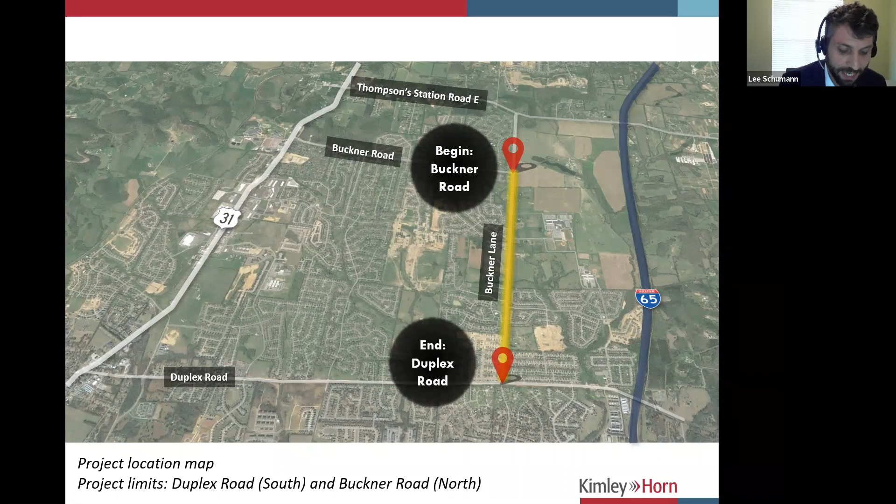Breaking the project into phases provides a lower risk of the entire project being delayed by right-of-way negotiations or utility conflicts. It also allows flexibility in the schedule to navigate the narrow corridor of the south segment. Based on that, we felt we had a higher potential for benefit in a phased approach, and more potential for delays in the design and construction of two miles of roadway.

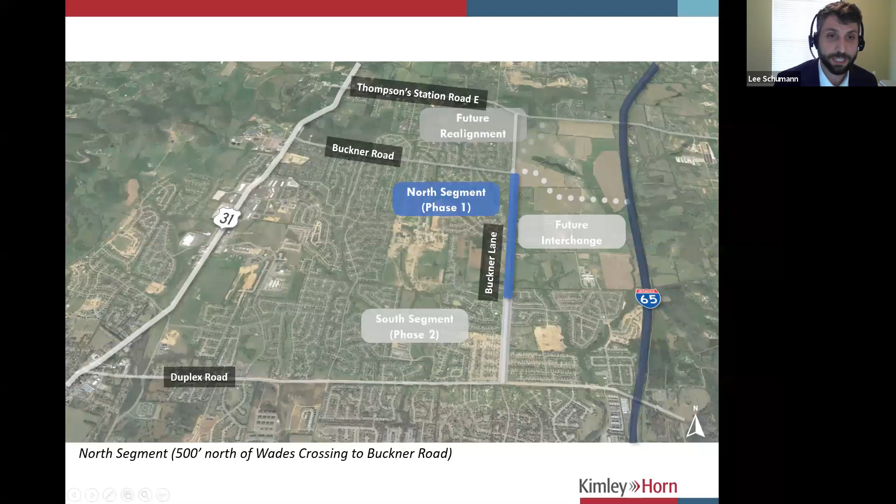So where are we in the process? Currently, we're finalizing the preliminary design of the north segment. Preliminary design represents roughly 30% of the design effort. Our goal here is to understand the design elements and impacts before we get into the detailed design in later phases. The next upcoming task on site will be the geotechnical investigation.

The purpose of this is to get soil and pavement borings along and adjacent to the roadway to understand pavement and soil conditions to aid in our design efforts. Some of you may have received letters explaining small cores may be taken along your property adjacent to the road, and for the rest of you, you may notice short lane closures for coring of the existing pavement. Luckily, this is a fairly quick process.

Next, we're in the process of gathering your feedback. So please ask questions during the presentation. As Chuck mentioned, there's a Q&A function at the bottom of the screen, and please be sure to fill out your comment card afterward. We'd love to hear what you have to say.

Finally, we're preparing to begin the right-of-way design services, which is the next phase in design. In this phase, we will get into more detailed design aspects of the project and work to nail down the construction limits of the project.

As most of you know, traffic is an issue now, and with the redistribution of traffic from the I-65 interchange and new development along this corridor, I think we can all agree increased capacity is needed on the roadways. As I noted earlier, this project will provide connectivity to the newly constructed Duplex Road and the upcoming interchange. Its construction is also very integral to meet the requirements of the interchange build grant, as well as providing other modes of transportation with the proposed sidewalk and shared use path that run along the roadway.

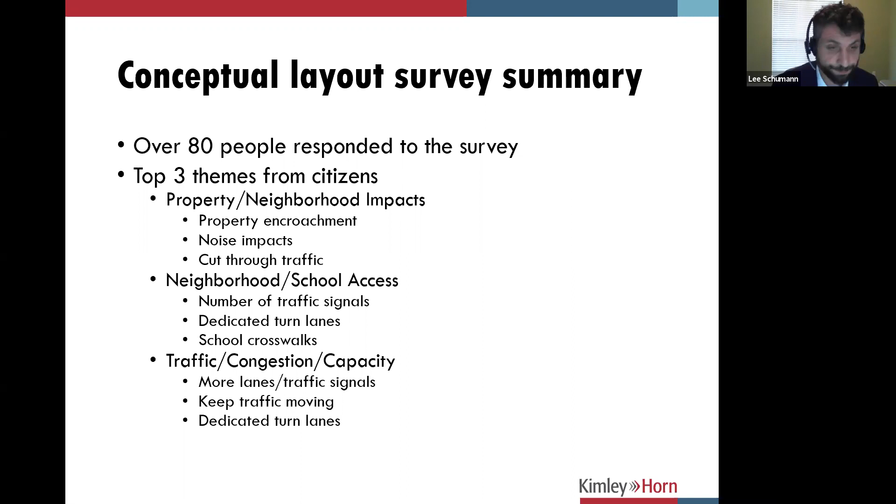So as you know, Buckner Lane is primarily a 2-lane arterial road with little to no shoulders, ditches on either side, and it serves about 9,500 cars a day.

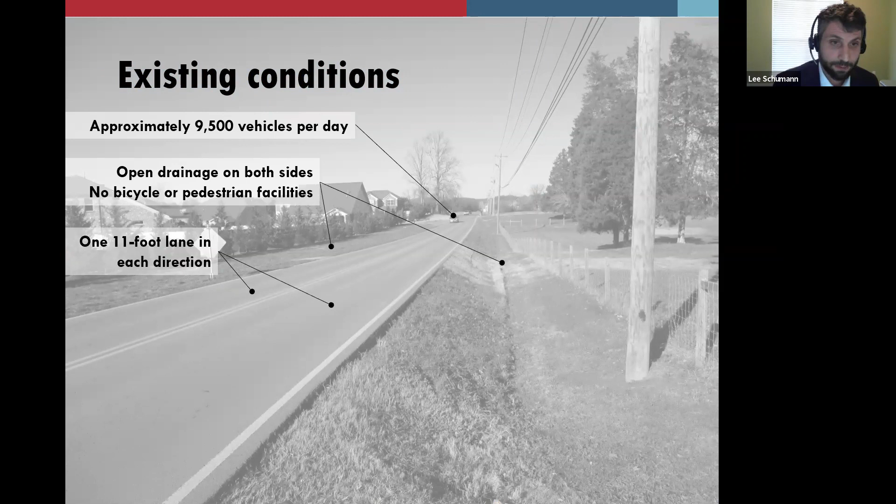For our proposed typical section, we took the city standard arterial section, which has a 95-foot right-of-way, and after collaboration with city staff and feedback from you, brought it down to an 85-foot right-of-way width in an effort to provide the needed capacity for future traffic, as well as bike and pedestrian facilities.

We tried to do this while limiting our footprint along the corridor. This has been done through narrowing the grass strips and travel lanes, and removal of bike lanes. Also, we've added curvature along the alignment to minimize impacts to properties directly adjacent to the road, as well as to take the straight-as-an-arrow racetrack feel away from the road.

Next, Brad Waldschmidt will discuss the traffic analysis performed for this project.

Thank you, Lee, I appreciate that. So as we move to the next slide, we all know Spring Hill has been growing and continues to grow, and in particular this area of Spring Hill along the Buckner Lane area is going to continue to grow in the future. Lee's hit on some of those.

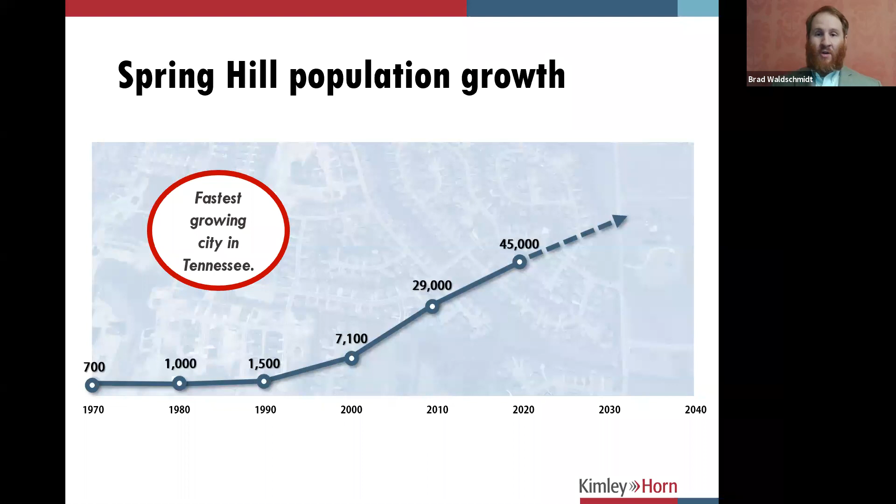As we move to the next slide, some of the reasons for the future traffic growth are developments like the Alexander property, as well as the Buckner Road extension to the future I-65 interchange. That's what's leading to our traffic forecasts showing that in 20 years, traffic volumes along Buckner Lane will reach 24,000 up to 38,000 cars per day.

That's what has driven a traffic analysis to show that Buckner Lane really needs to be 5 lanes when all this traffic growth occurs out in this area. So as we moved into our traffic analysis, we took all this into consideration.

What we noticed is several traffic signals will be needed along this corridor of Buckner Lane. Tonight, since we're focusing on this northern piece of the project, we're going to focus on the 3 intersections shown on your screen in blue: Twin Lakes Drive, Stewart Campbell Pointe, and Spring Station Drive.

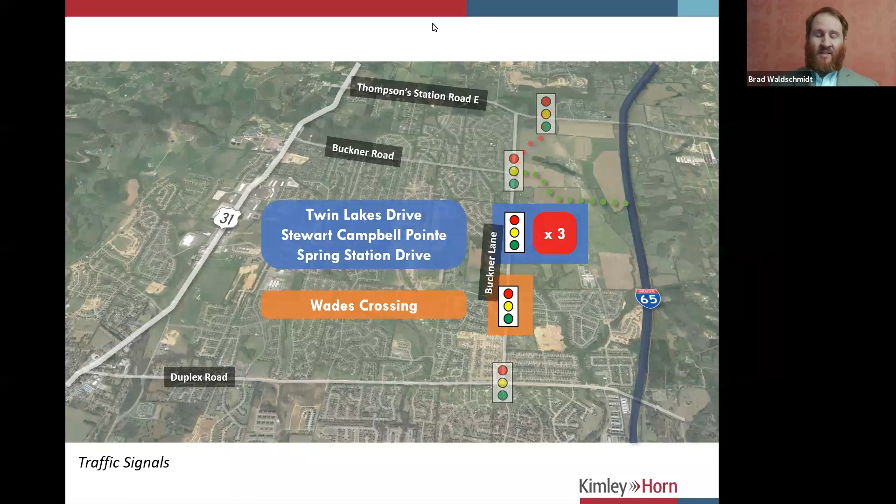Zooming in on the next slide to those intersections, the traffic analysis showed that based on the traffic volumes on Buckner Lane, as well as the traffic volumes using Twin Lakes, Stewart Campbell, and Spring Station, there will be traffic signals needed at each of these 3 intersections.

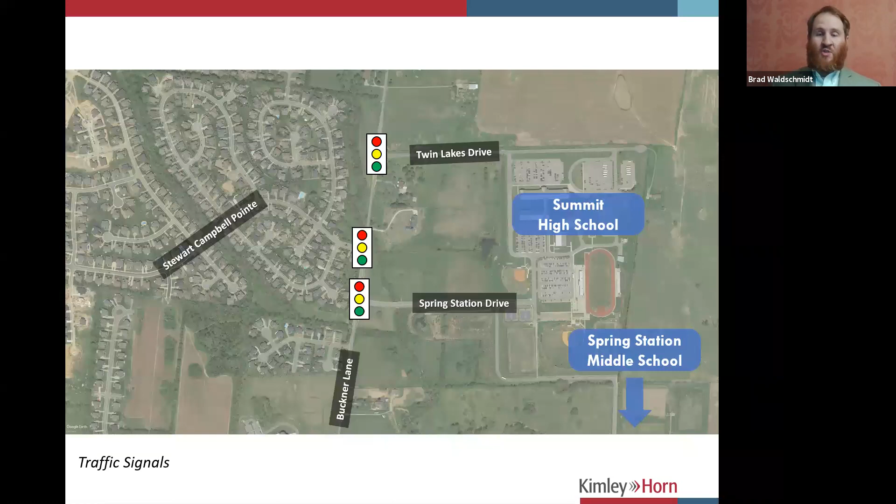In conjunction with those traffic signals, signalized pedestrian crossings will also be provided so that pedestrians and bicyclists using the sidewalks and shared use paths will be able to cross through the intersection and cross Buckner Lane, which will be very helpful and valuable, especially given the project's proximity to Spring Station Middle School and Summit High School.

Additionally, at each of these 3 intersections, because of the traffic volumes turning there, we're also incorporating left turn and right turn lanes into the design to minimize impact to the general through movements along Buckner Lane. So these are the inclusions in the design based on the traffic analysis to handle the forecasted growth.

Primarily at these 3 intersections, where we think there'll be more turning movements, as well as these 3 traffic signals, these have really been some of the driving forces helping to influence the preliminary design.

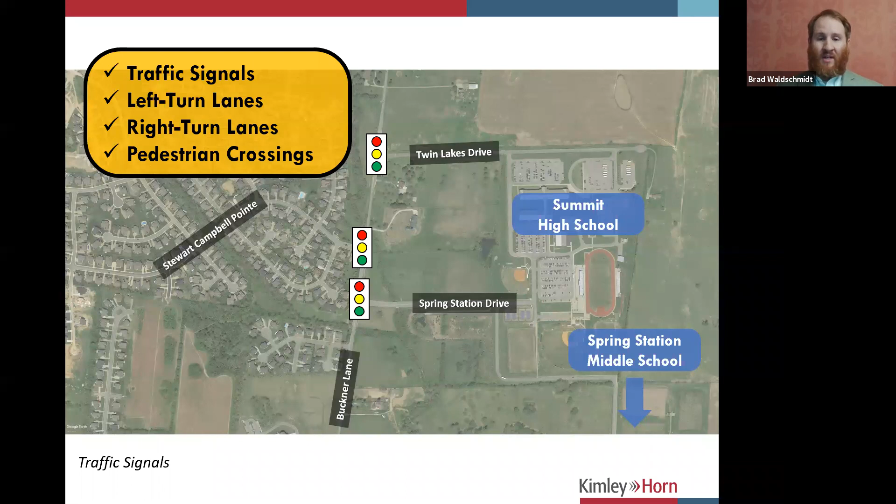And I'll turn it back over to Lee to kind of walk through the preliminary design. Thanks, Brad.

So here's an overview of the north segment. The next few slides break down the preliminary design into smaller segments so you can see it in more detail. These next few slides are available to download.

Since we can't meet in person, I'd like to go over the exhibits with you to explain a few things and hopefully make it easier for you to review at home.

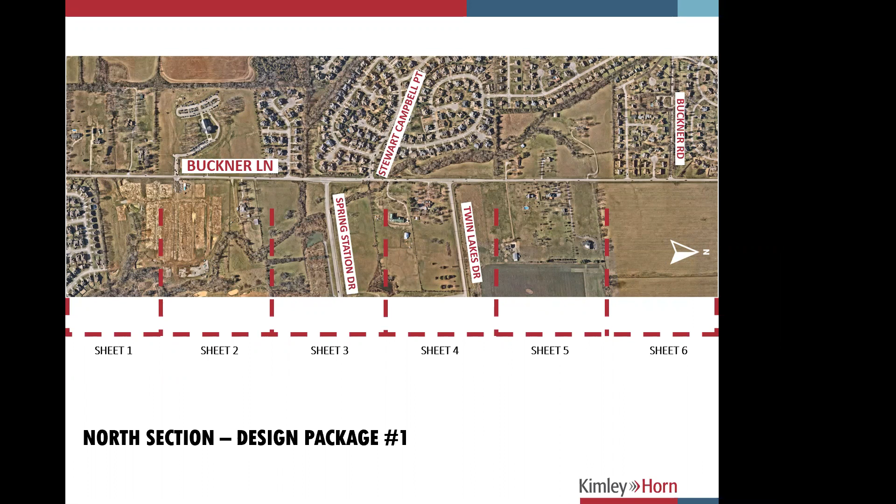This slide is the beginning of the north segment. In these exhibits, you will see the existing conditions, which are shown in gray. The bold lines represent the proposed layout as well as future striping.

The red shading represents the permanent right-of-way that will be needed for the project and will essentially encompass the roadway, sidewalk, and shared use path. In green, you will see the limits of the slopes, which represent the length or area it will take to

tie the side slopes back into the existing ground once the improvements are made. This is a temporary slope easement and will be grass when construction is complete. The blue shading represents the temporary construction easement, which is room given to the contractor to maneuver as they construct the project. The hatched red lines are permanent drainage easements that encapsulate drainage structures outside of the right-of-way to give room for the city to provide maintenance.

Now, in terms of the preliminary design, you can see the tie point that will be made between the northern segment and the existing roadway, where we go from a 5-lane section to a 2-lane section.

Also on this sheet, you'll be able to see some preliminary drainage. The black shaded rectangles are inlet locations. The arrowed lines are ditch locations, and the open-ended rectangles are head walls, which capture drainage from adjacent properties.

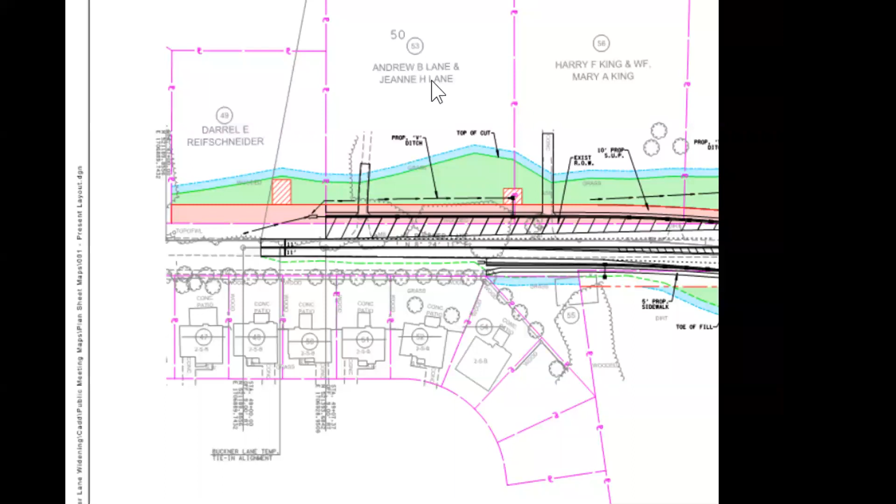On this slide, we are adjacent to the Church of the Nativity, just to orient you a bit. As you can see, the property owners' names are in gray, and that'll help you as you review from home.

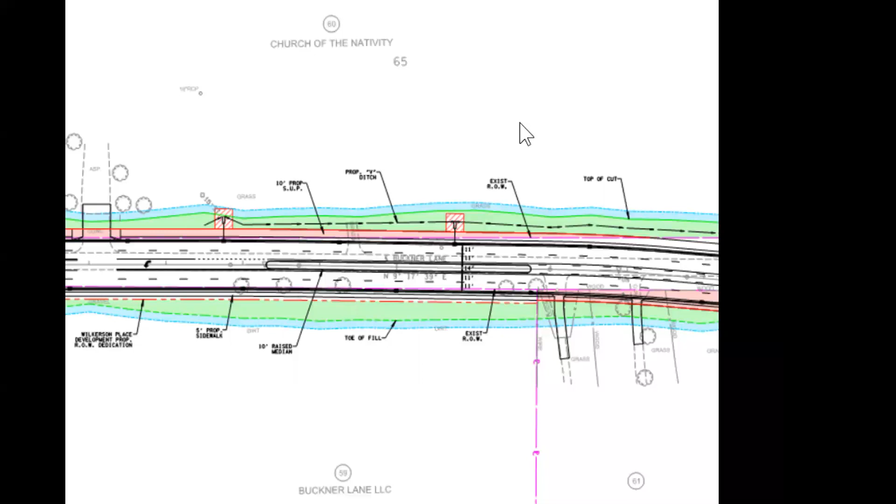A few new aspects on this slide is the location of a raised median, shown roughly in the middle of this slide in the center turn lane. Also, you can see where we have added curvature on the far right side of this page to minimize impacts to the homes that are directly adjacent to the roadway at the Glessner intersection.

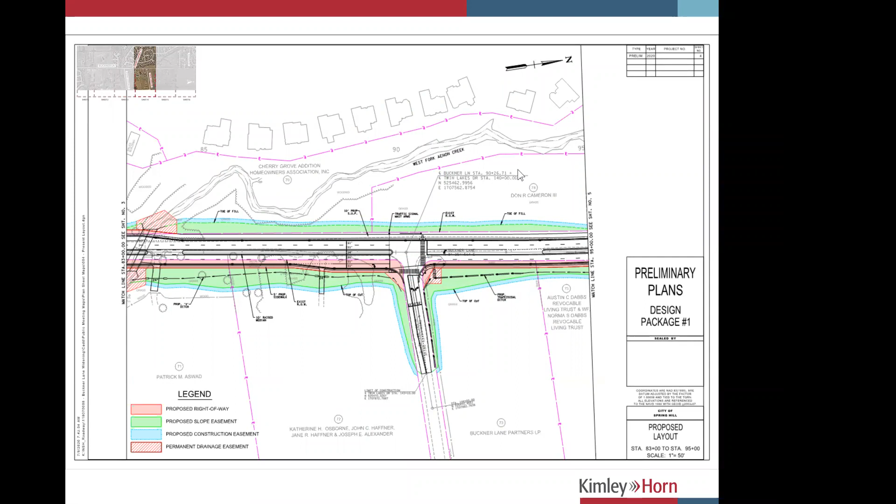This slide is located at Twin Lakes Drive, which shows the second box culvert. You can also see the dashed purple line that represents the existing right-of-way that runs adjacent to either side of the roadway. You can also see another dashed line with the text PL, which represents the property lines along the corridor.

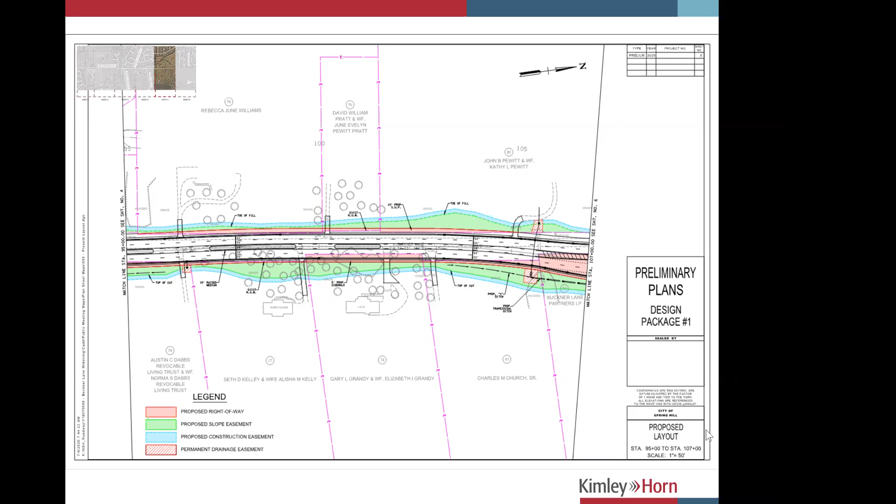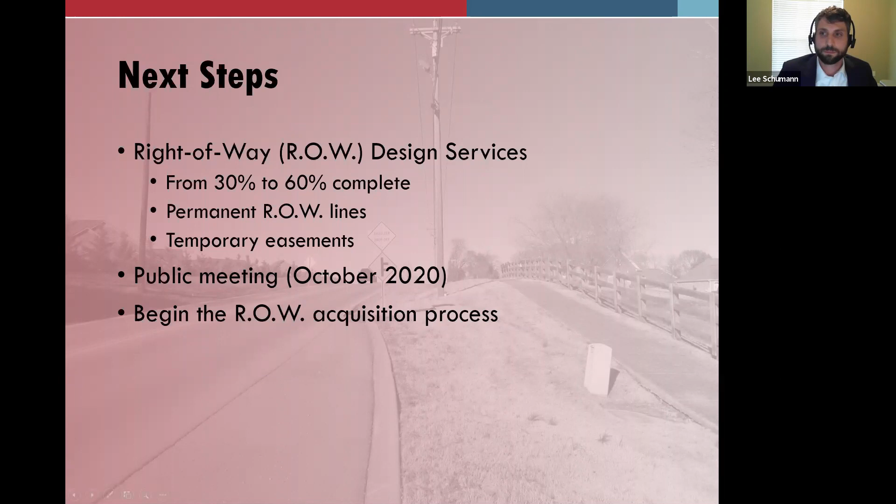Great. All right, so why don't we do another question? Okay, so here's a question from someone that lives on Eric Court, which is a cul-de-sac, and they want to know how they'll be able to turn left, which I presume they mean how to turn left onto Buckner Lane.

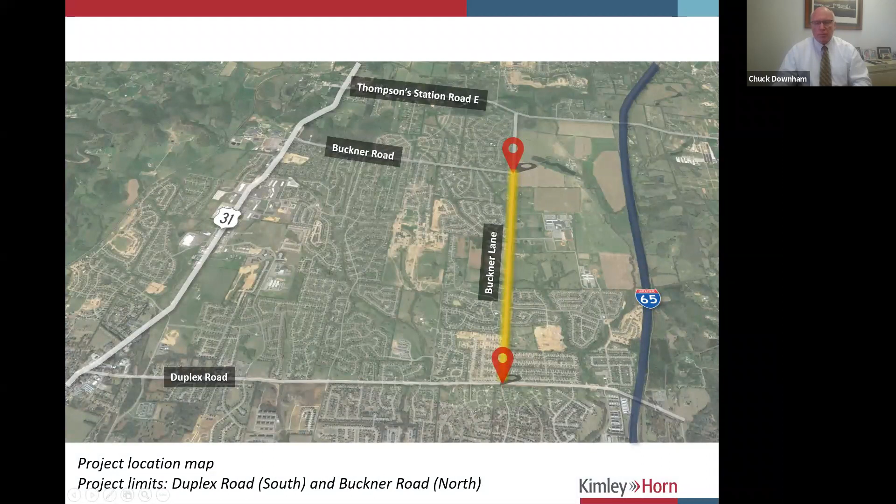Kevin, do you want to field that question using the plan graphic from the latter part of the presentation package? That might help illustrate what's being proposed in terms of design. Yes, although I will -- oh, here we are, Eric Court right here. Perfect. Right.

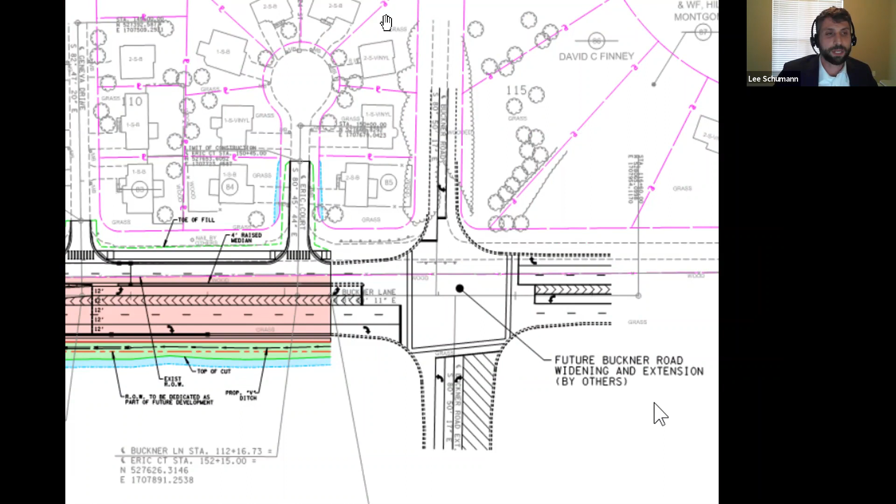So, Lee, your thoughts from a design engineering perspective, and we may want to call on Brad if he's available. From a design perspective, unfortunately, Eric Court falls in very close proximity to the center of this intersection. You can see, in order for them to go northbound, they would have to cross 5 or 6 lanes of traffic. So to limit turning movement conflicts, we've had to block this access with a small raised median. The folks on Eric Court will have to go southbound on Buckner Lane and take Geneva Drive around to Buckner Road in order to go northbound on Buckner Lane.

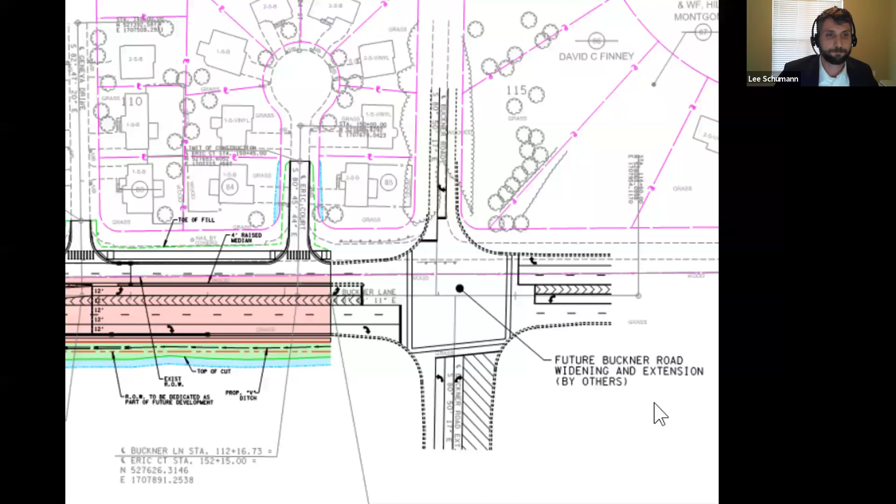Thank you. Okay, our next question asks about noise: is there any provision for noise abatement?

I think generally speaking, we obviously have a major road corridor, and we've had a number of people in the different comment opportunities provided along the design process express concerns not only about aesthetics, but also the proximity of traffic to homes, and what we're doing in terms of potential noise abatement. For the road corridor itself, there is not a current design intent to include barrier walls or noise barrier walls as part of the design process. A lot of that has to do with the insufficient amount of right-of-way to accommodate those types of structures.

Not to mention just the abruptness that often those will create from a design and aesthetics perspective. What we hope to accomplish along the corridor are different types of aesthetic treatments, landscaping, buffers, and other screening measures that could serve in part to help dissipate and address some of the noise associated with traffic along the road corridor. Can we completely eliminate noise?

Absolutely not. The road is already a very busy corridor, it's already a noisy corridor. Our hope would be that we can introduce measures and work cooperatively with property owners associations to help reduce some of the impact associated with noise on the corridor. Lee, anything else to add from a design perspective? I think you hit most of the topics.

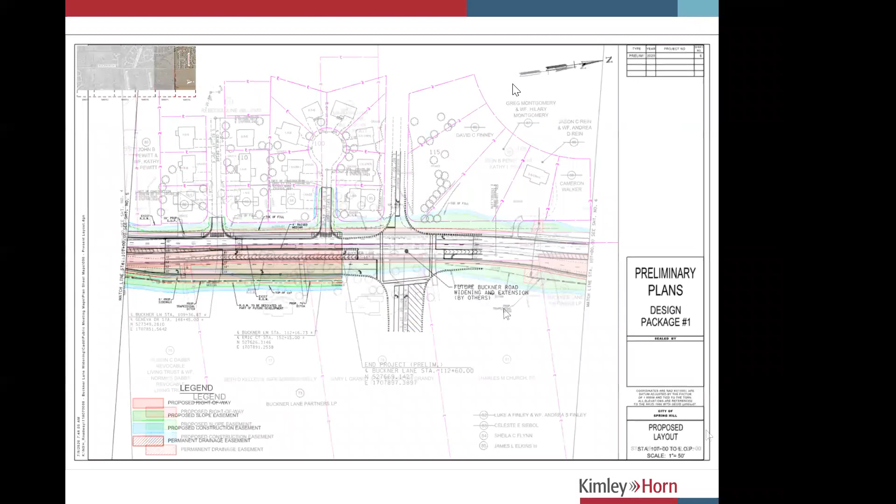So I will go back to that. You guys will have to. That may be something we have to address later, and maybe get with this person, because I'm not sure I can address that off the top of my head. Okay, yeah, I'm not either. Chuck or Victor, if you guys can.

I think the fundamental question there is, are we going to allow U-turns at any of the major intersections? If they can't turn left out of their driveway because of a raised median, are we going to design in U-turns at the major intersections is, I think, the real question there. Well, there's no intention of blocking any private drives with the median.

So, we do not have accommodations for left turns at Twin Lakes, or U-turns, pardon. Okay. What I might suggest, because that series of questions involved a specific property, we would encourage that property owner to reach out to either Victor Lay or myself, Chuck Downham. Let us pull up the plans. We can schedule a virtual meeting with you, or a call, or even have you drop by City Hall and visit with us, so we can go over the plans in a little bit more detail.

I understand there may be another question regarding that same property. We can certainly get into specifics of that involving any property owner along the corridor, and schedule a one-on-one conversation with them if that would be preferred. That way we could get into a lot more detail probably than this type of setting.

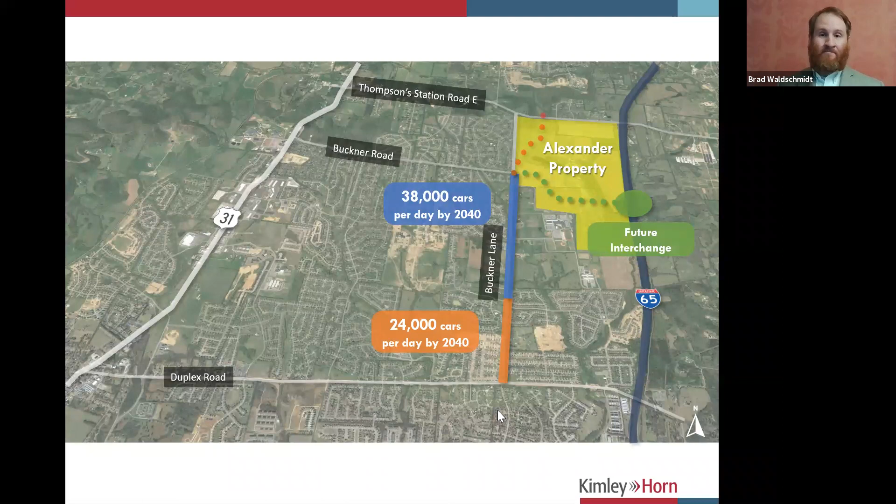I appreciate that, Brad. I think you covered it very well. Hopefully that addressed the comment question we received. Kevin, what else have we heard?

So we have a question about the property. What will be done with the existing farmland along Buckner Lane between Buckner Road and Thompson's Station Road? What is the proposed start date, and from which direction? That's a great question, and certainly there's a lot of dimension to the answer.

The best thing I can suggest right out of the gate is for the person inquiring to get on the city's website and query 2660 Buckner Lane, that's the name of the project. It's a large mixed-use master plan project approved back in 2017. They're going through a plan amendment process right now, so you'll see current information on some minor changes the developer is proposing.

The expected timeline is that the project will develop starting on the western edge of the property, then move to the inner core, and eventually to the eastern portion of the site. The sequence is a combination of residential and retail in the early phase, followed by more residential and commercial in the latter phase, and ultimately office development once the interchange is constructed. So it's a multi-year, multi-phased development approach, with a lot of road work and utility infrastructure being installed.

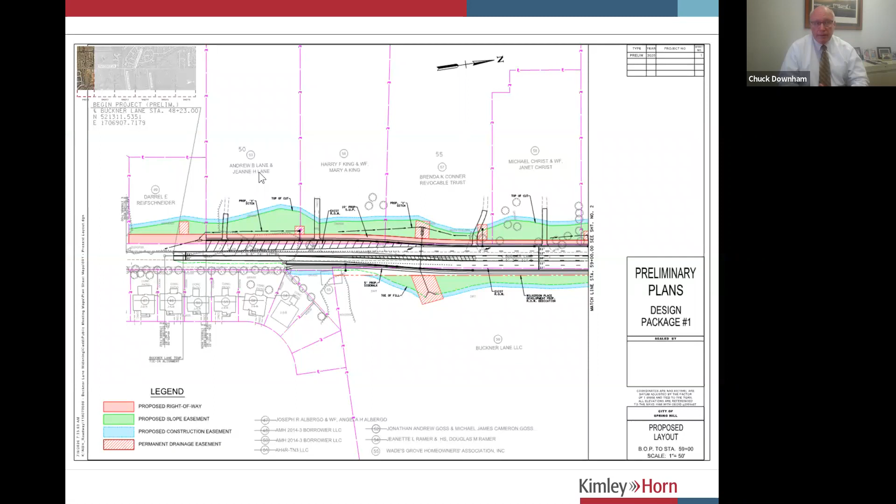Someone would like to know how they can find out more information regarding right-of-way on the north segment. During the presentation, you saw several different slides toward the end that go into detail as far as the extent of the impact, both for right-of-way and easements. Our recommendation would be for that person to take a look at those slides, as well as the PDFs we'll be posting to the city's website. If they have specific questions about a particular parcel, feel free to reach out to us, and we can go over those in more detail with them. Hopefully the information we've got, both in the presentation and the individual sheets, will give them answers to those questions.

Okay, and a couple more questions. This one I think I can answer. Is the meeting at 7 covering the same material? And that answer is yes.

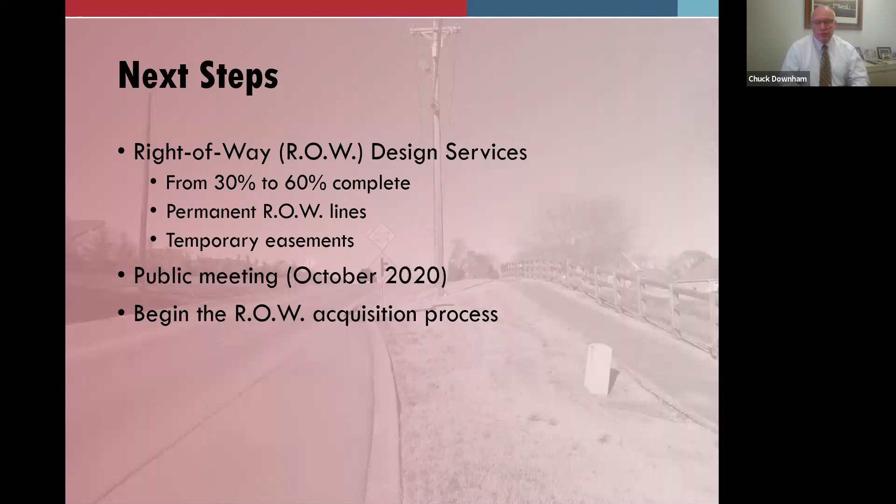We have a question about the anticipated speed limit of the road. I'll let Lee or Brad address that. We have a design speed as well as what we anticipate to be the posted speed. The posted speed will remain the same. Our design speed will be 45 miles an hour, and it will be posted at 40.

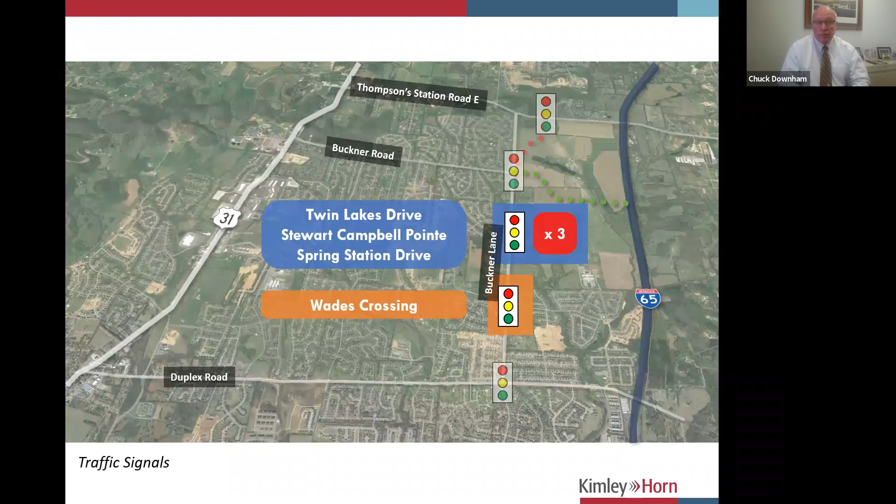Thank you. And then one last question asks, the northernmost section of Buckner Road, what will happen after it is realigned? What will happen to the existing road? Will it be covered in grass, for example? It's a great question. I don't know that there's been any final plans developed for that. There's been a lot of different things kicked around, including basically almost like a rail-to-trail type approach where the road would be abandoned and put into some type of a more passive use.

We expect that the westernmost edge of the Buckner Lane development project will be residential uses, so hopefully that will very much complement the adjoining neighborhoods right across the way. But there's been no specific plans at this point for what the city or the developer intends to do with that. I'm confident there'll be a lot more discussion and a plan developed in hopefully very full cooperation with the adjoining neighborhoods, done in such a way that everybody will hopefully benefit, whatever form it takes.

Okay, and now we really are at the end of our questions. That was the last question.

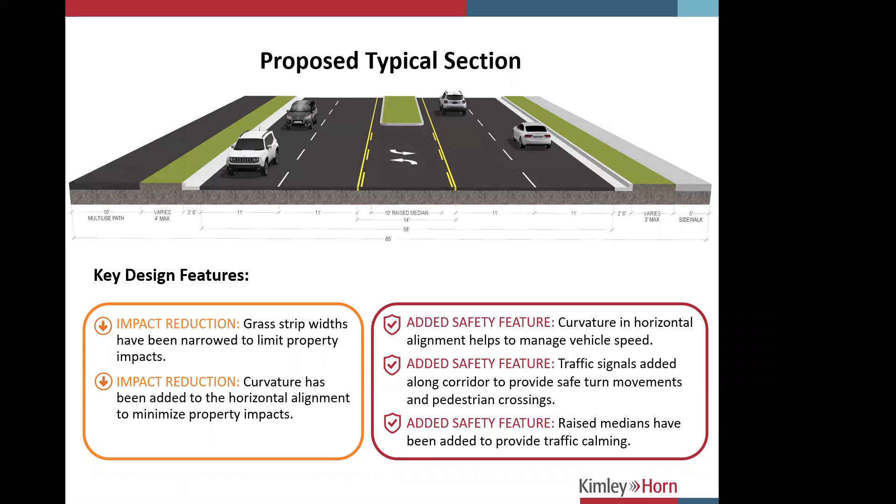We also received a handful of questions about turn movements, how people would be able to make left turns out of their development, for example. Let Lee or Brad try to field that particular item, because I know we provided a pretty comprehensive response on that. Sure, I don't mind taking that.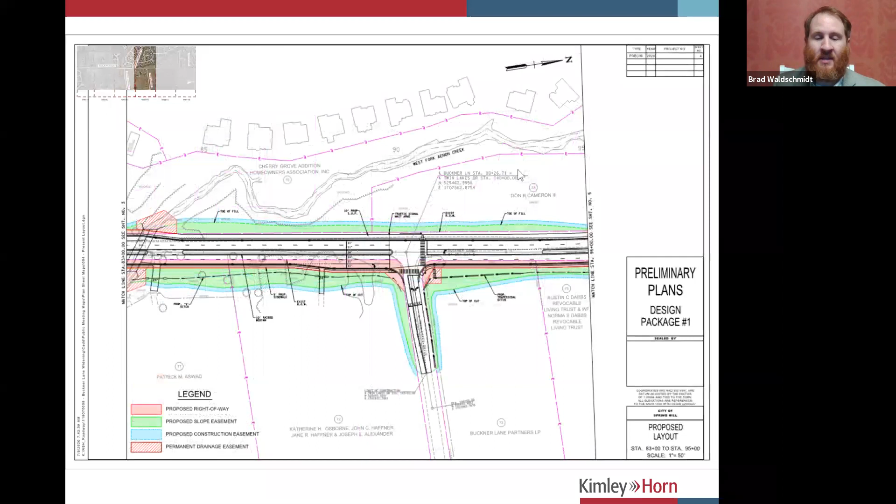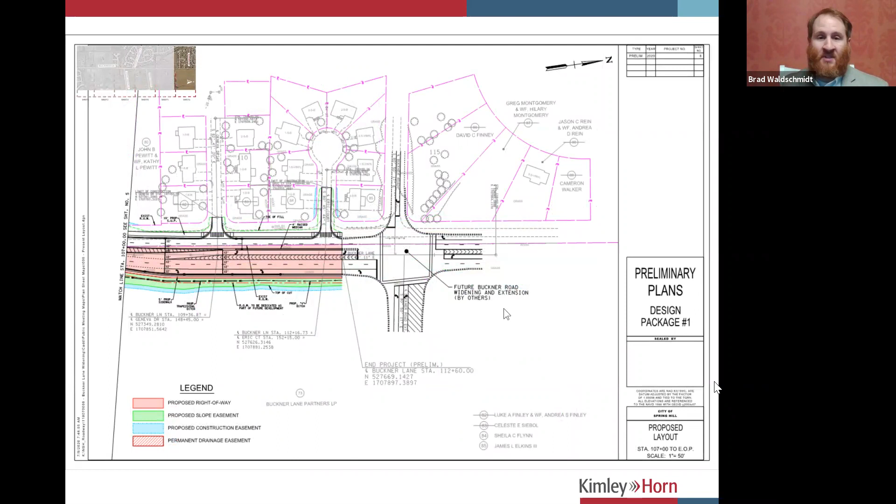Kevin, if you could move forward in the presentation to where Eric Court intersects with Buckner Lane -- I think that's a good example. Part of the traffic analysis and engineering design we looked at is as this road gets wider, especially at some of the larger intersections, what the intersection of Buckner Lane and Buckner Road will look like in the future. Just to the left of that intersection you see a cul-de-sac, which is Eric Court. Today, Eric Court sits on a 2-lane road, but as you can see on the design, Buckner Lane will be getting much, much wider.

For that reason, a hard median is being designed in front of Eric Court so that only right turns can occur. While that is an inconvenience, the reason is that turning movements and crossing many lanes of pavement to turn left in and out of Eric Court can be a problem and a concern sometimes. There are a few locations like that along the corridor, not everywhere and not in many locations, but some where engineering analysis and discussions with the city were applied to find locations like this, where a left turn out of an intersection would mean crossing many lanes of pavement. For that reason, this is occurring in some locations.

Lee, I'll turn to you if you have anything else to add. No, I believe you hit all the major points there. The other consideration is that for this particular location, the queuing of that left turn, especially if it ever develops into dual lefts, will be very difficult for a person to get out and go northbound from Merritt Court, not to mention the number of conflicts that will be caused by trying to cross that many lanes of traffic.

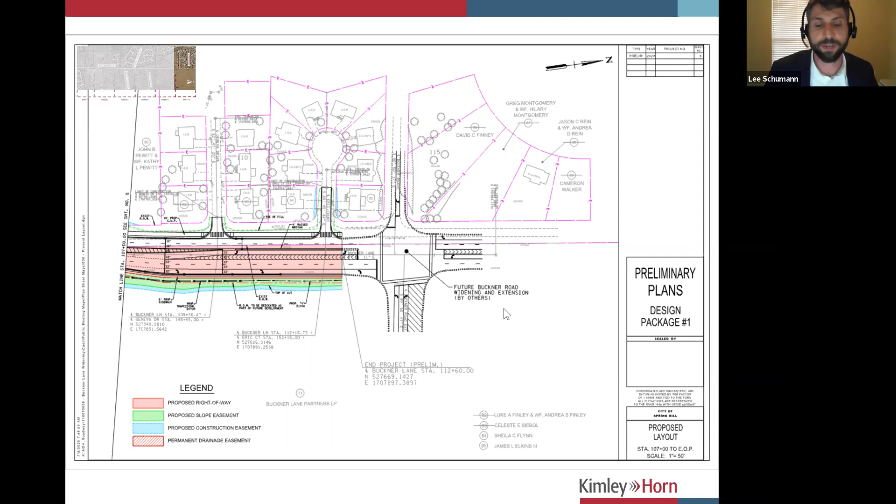Okay, and in the first session we also had a question asking about the property between Buckner Road and Thompson Station Road.

Very good question, and I may elaborate a little bit, especially if folks are not familiar with the development of the Alexander property, which is in the map graphic on your screen. There's been a lot of conversation about what happens to the old Buckner Lane once the new alignment, the realignment, takes place, basically cutting across. You can see the little dots on the graphic as Buckner Lane is repositioned further to the east. We've had informal conversations with the developer, but nothing has been formalized at this point in terms of what that might take the form of. There's been conversations about converting it to a trail or some type of passive pathway. That certainly is a possibility, but again, nothing's been really formalized.

For folks that may not be familiar with the Alexander property, that is about an 800-acre tract of land. It's a project that was fully entitled back in 2017, and it's just now getting underway in terms of design and development. It's going to be a multi-phase, multi-year project, building out over at least 15 to 20 years. The mix of uses will include a variety of different residential uses as well as retail and office. In the immediate near future, the emphasis will be on residential and a light level of retail development. But as the infrastructure continues to build out, including most critically the interchange, we'll start to see more intensive development taking place, obviously because of the proximity and access directly to the interstate interchange at that point. Hopefully that will mitigate and minimize any outside or immediate vicinity impacts as that project develops.

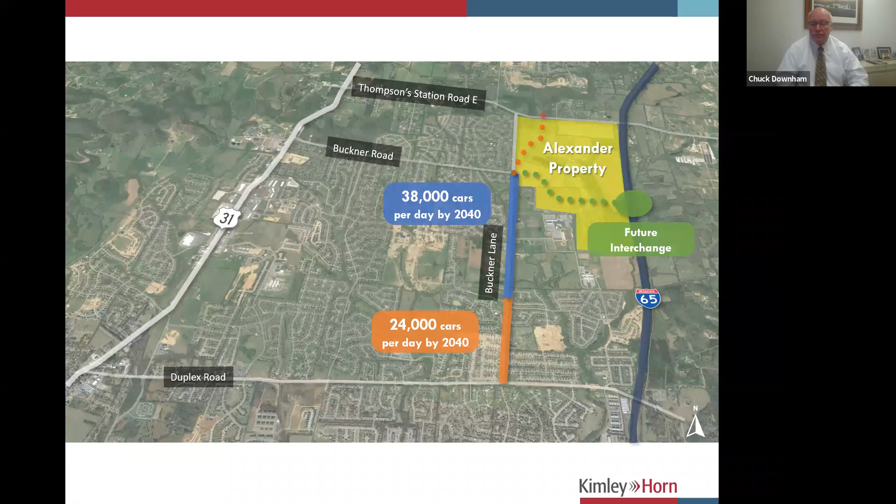Okay, just a couple more questions. One asks about the southern section: when are we going to learn more about the southern section of the corridor?

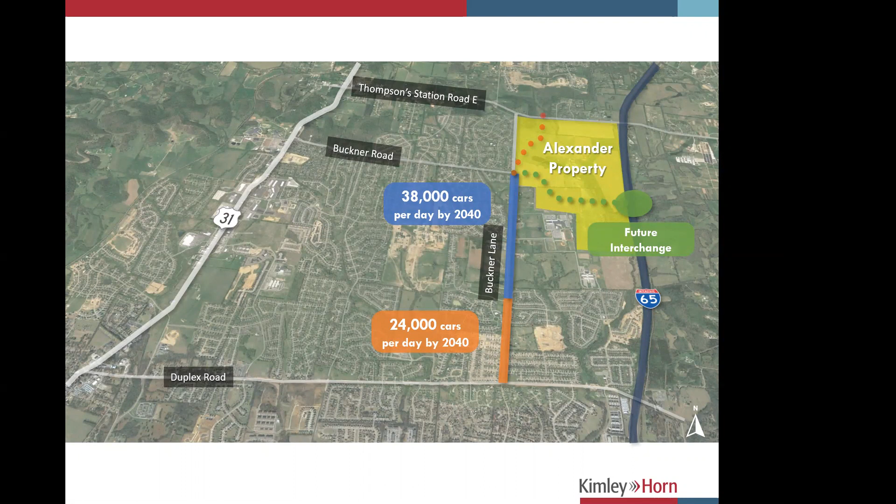I'll let Lee circle around on the project schedule diagram, and I think it hits some general milestones that will give people a pretty clear picture of when we plan to start that. Thanks, Kevin, for bringing that up. So we began the preliminary design of the southern section in December 2020, late this year. We have on our internal schedule to try and have a public meeting sometime in February 2021, very similar to this, for the southern segment.

Okay, and then the last question expressed concern about the length of time it took on Duplex, and they're concerned that they don't want that length of time to be on this project too. If we could address that briefly.

Well, I know that Lee, at the outset of his comments, talked a lot about the design approach and the fact that we're breaking the project into two segments, a north segment and a south segment. Part of that is to help manage the entire process in terms of the length of time it takes to go through design, right-of-way acquisition, and ultimately construction. So by breaking it into a smaller segment, we hope to be able to turn the construction around. We've placed in a tentative schedule about 18 months to complete the north segment, and then about 18 months as well to complete the south segment, which will start about a year after we get the north segment underway.

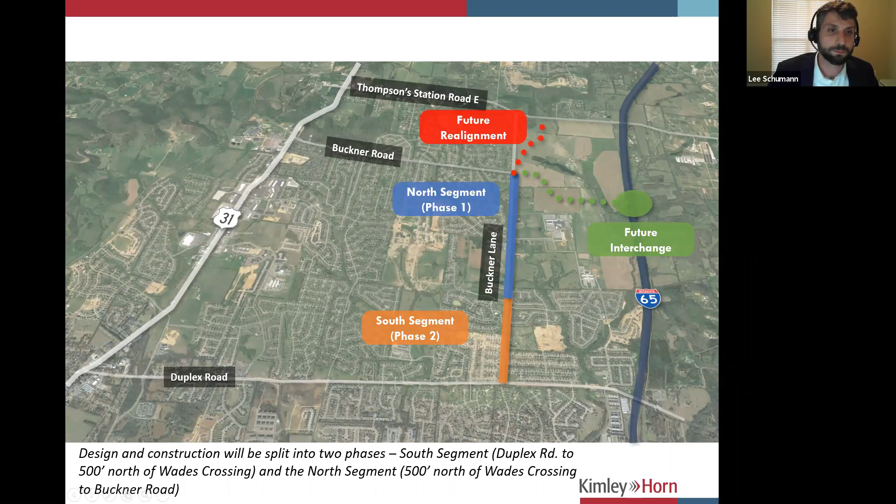And that was our last question that hadn't been addressed yet from the first meeting.